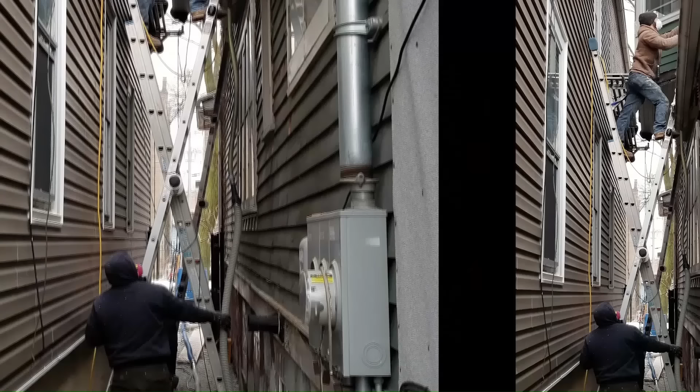Hey, we're back, and today, what are we talking about, Rich? We're going to talk about drilling and notching floor joists, drilling studs, and top plates. Drilling holes. That's what we're going to be doing. Drilling holes. Yep. Ready?

I'm drilling holes. I'm drilling holes.

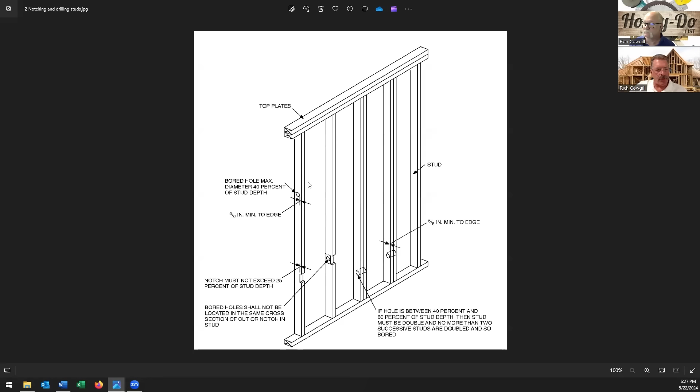So anyway, on a structural wall like this one, you can only drill 40% of the width of that stud. So on a 2x4, that's 1.4 inches. And again, 5/8 of an inch minimum from the edge. But if you were going to be doing a non-load bearing wall, you can go 60%. So now you're going like 1 3/4. So you can go a larger hole.

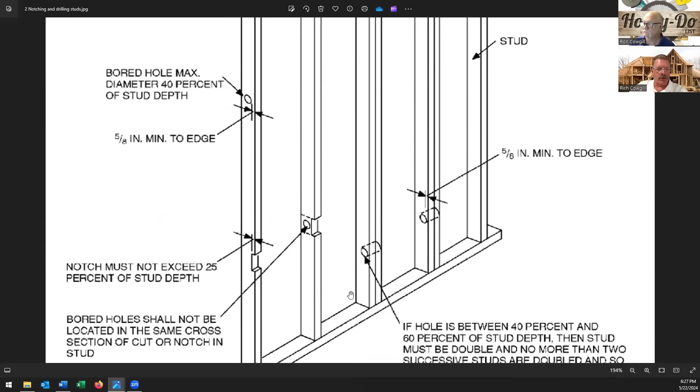And then you can see there, it says stud depth, but then that stud must be double studded, and no more than 2 successive doubled studs are bored. Right. Again, this would only come into play if you've got like a kitchen sink with a 2-inch drain or something like that, where you've got to go over that. But if it's a bearing wall, you can't do that. So that's why you try to lay out your studs to work.

Yep, exactly. And again, here's more notching. Mm-hmm. And in the studs, I don't particularly like to let the guys do that, but I will let it slide once in a while if I have to. Well, and again, the notches can't be more than 25% of the depth. So on a 3.5 inch wall, 25% of that is 0.875. So that's 7/8 of an inch. Right. So you can notch 7/8 of an inch deep, but that's your max. Right. And you're barely getting a piece of 1/2 inch conduit through that. So just drill the hole. I should say drill the hole.

Well, and for us, it's actually kind of interesting, because we wire with extension cords, Romex, you can get away with more small holes, which is still stronger. 5/8 of an inch. When you put drywall screws up, you always take the thickness of your drywall or your wall finish plus 3/4 for penetration. Which is interesting that they say stay 5/8 back from the edge, because your drywall screw should go in 3/4 of an inch. So really, you'd want to be at least 3/4 of an inch back.

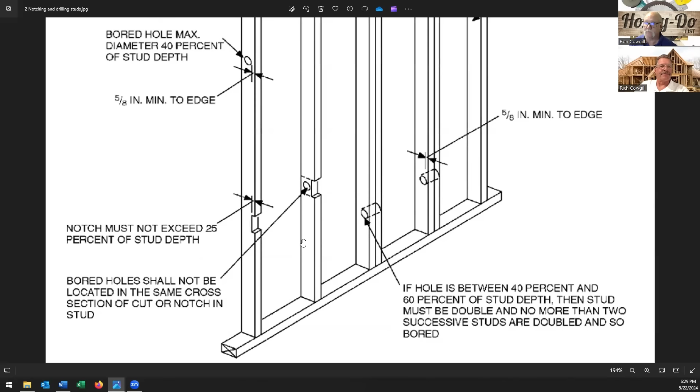Yeah, you're using those stud protectors that you get. On plumbing, water lines, yeah, but not necessarily on conduit. No, we don't do it for the conduit, but I guess if I was running extension cords, I might. Yes, we do. Or we try to keep them right in the middle. Yep. And then the last one's just top plates. What happens when you start cutting up top plates? A lot of these guys, they'll just notch to get their vent up through the roof. Yep. Instead of drilling a hole.

But a lot of times, especially on a bearing wall, if you're over 50%, then you're going to have to put backing on there. Yeah. The 16 gauge 1.5 inch wide metal. The thing is, I don't think I ever really noticed before that it said 8 10 penny nail fasteners on each side. You're right. That's a lot of nails. Yeah, it is. It's going to split. That's what I was thinking when I read it too. It's just going to split the top plate in half. I don't know. It's like chisels.

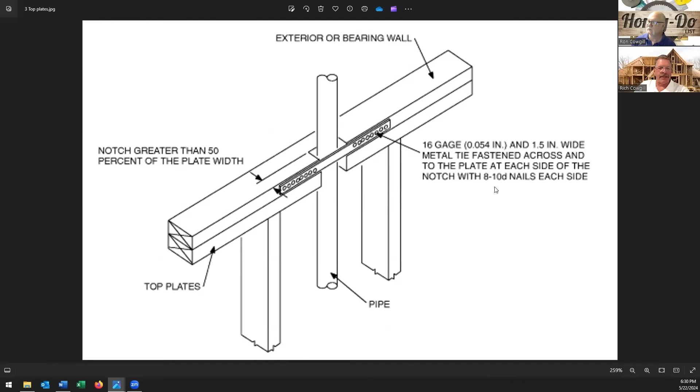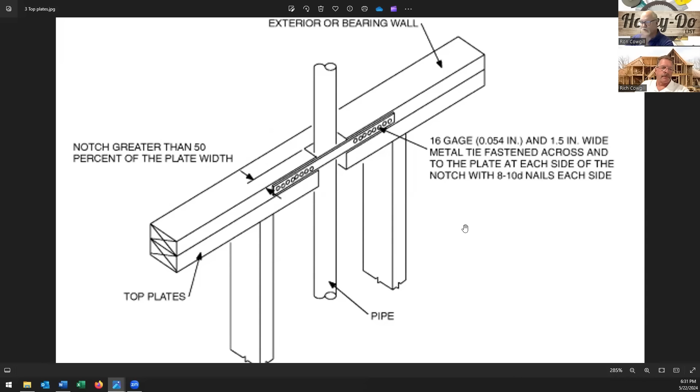But it doesn't tell you how long it needs to be, right? 6 inches past each end. Metal tie must extend not less than 6 inches past the opening. Okay. So 6 inches past the notch on either side. So we're going to do a little bit more than that, that way you can get all those nails in there. And I guess maybe if you were to toenail one up, one down, and then straight, so they're not all going into the same grain, you get less of a chance of splitting it.

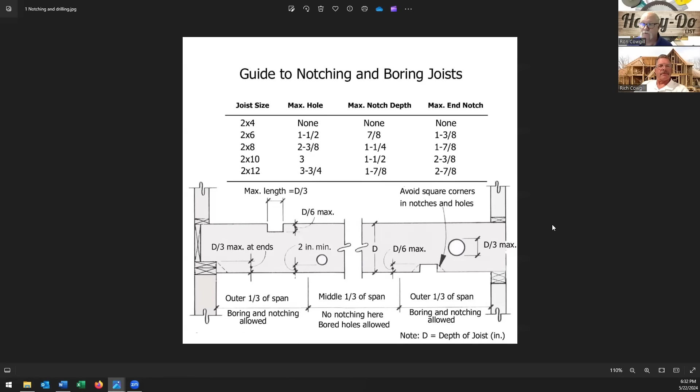So there's your guide for drilling holes. At least now you know where you can drill and where you can't drill when you're starting to build stuff and you're remodeling or doing new construction.

And we might as well say, where did you pull this information? Is it through the IRC? Yes, the IRC; Building Advisor was the first drawing. I like that one better than even the IRC. Okay. But then, yeah, everything's from the IRC. Okay, there you go. All right.